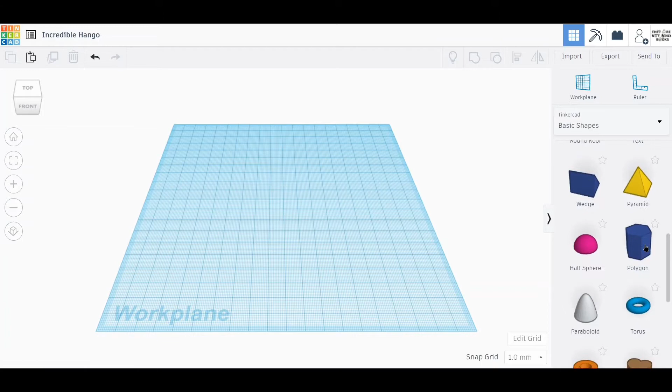Let's drag it over to the middle of the workspace. Since we're making a triangle, let's open this menu and set the sides to 3. Let's adjust the view to get a good angle, and use this top white dot to make the triangle a little flatter. If we hold Shift while dragging this corner white dot, we can keep the shape the same while making our triangle bigger.

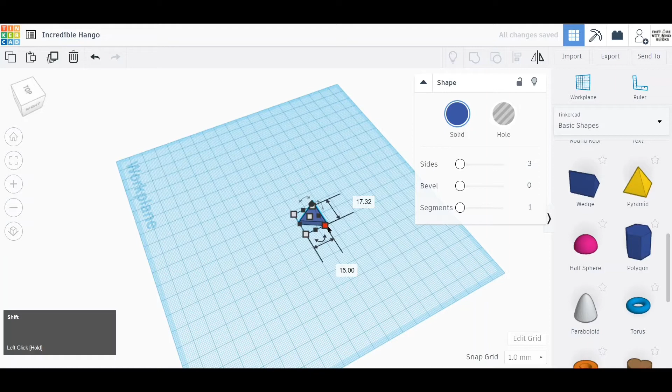Let's learn about holes now. Up until now, all we've been doing is adding shapes. There's also a way in Tinkercad to remove material. The basic idea is to create a shape and turn it into a hole that will carve away from anything solid it's touching.

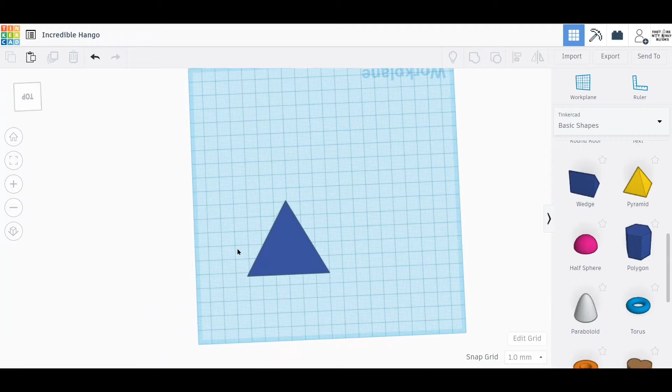Let's use this triangle as an example. We'll copy using Ctrl-C and paste using Ctrl-V our triangle to create another one the exact same size, then shrink it a little using the corner white dot and holding Shift. Let's switch views to make sure our new smaller triangle is taller than the original one.

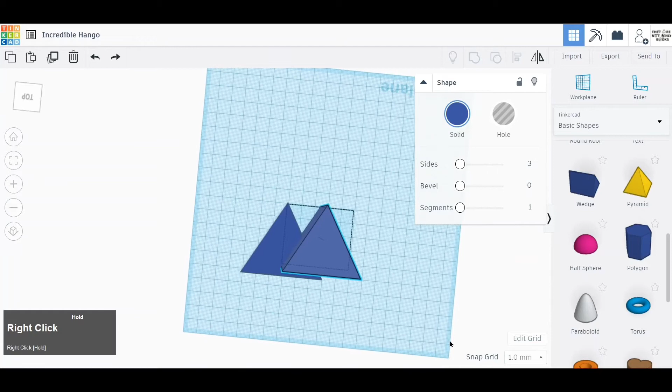Alright, let's return to the top view now and drag the smaller triangle over so it looks centered with the larger one. Over here, let's click this button - it turns the selected shape into a hole.

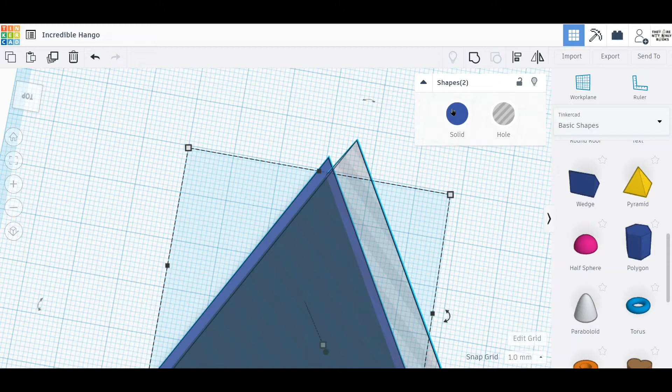Now, to actually carve out of the original triangle, we have to do what's called grouping. This means Tinkercad will treat the grouped objects like a single one, which is also good for making holes. We'll click on one triangle, hold Shift, and click the other to select both. Now we'll click this button, which will group them. Great, now we have our triangle.

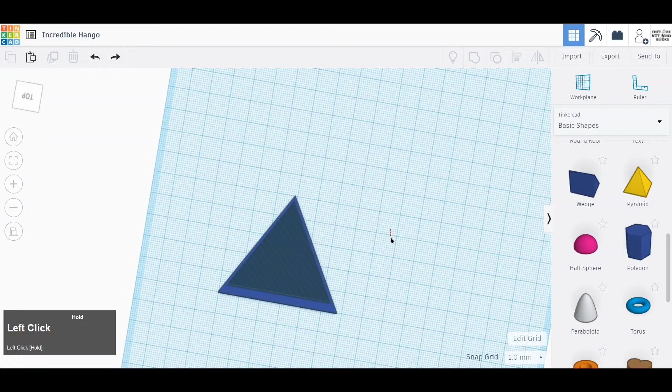Quick note: if you're having trouble centering your triangles, or it's difficult to make out how large they are, click this button over here. This new view is called orthographic, and it shows everything on a 2D plane. If you change the view to the top, it's way easier to see how the shapes look.

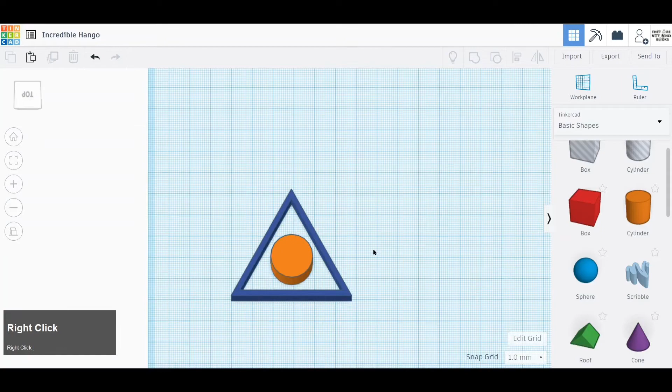Anyway, let's get back to this. Next, we're going to add our circle. Let's start by dragging over a cylinder and centering it inside the triangle. Before anything else, we need to make sure our cylinder is touching all the sides of the triangle. Let's check this by orbiting around. If it's not touching on all sides, make the cylinder a little bit bigger.

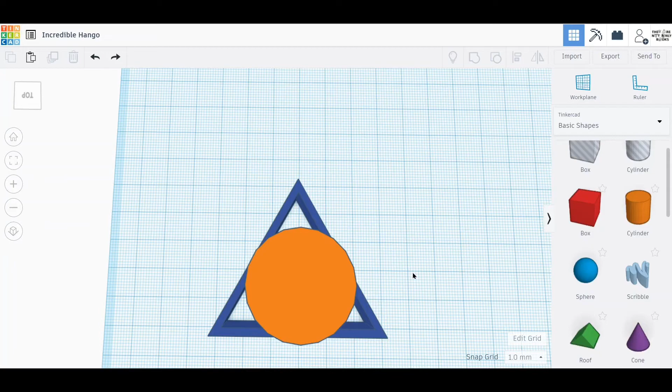Now, just like before, to make this shape a circle outline, we're going to add another smaller cylinder and make it a hole. So let's drag over the cylinder, resize it to be a little smaller than the original, make it taller, and drag it to center over the other cylinder.

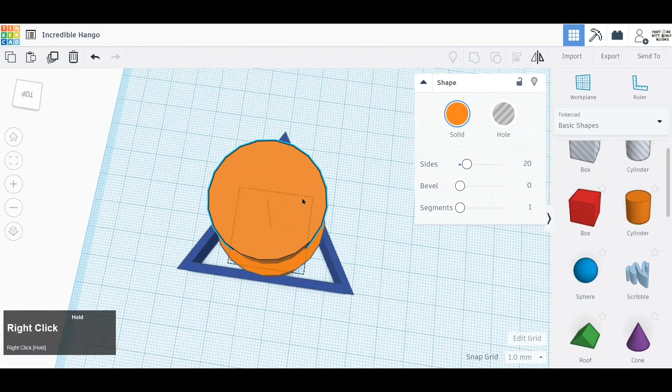This is where the benefits of orthographic view come in. From this view, it looks like our new cylinder is way bigger than the old one, but if we change our view, it clearly shows that it isn't. Using orthographic view gets rid of this illusion, making it easier to center it accurately using the arrow keys.

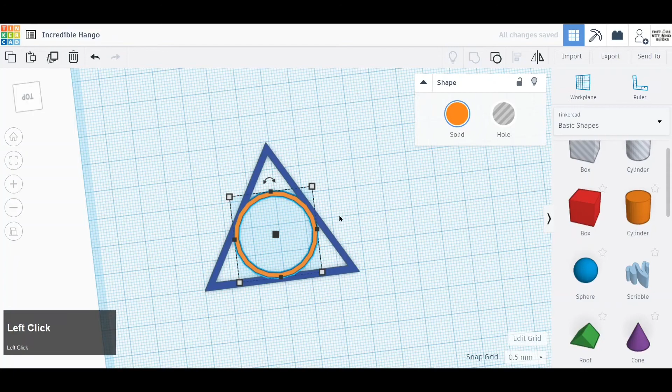Now, just like before, let's make it a hole and group it with the other cylinder. Now let's do the last part of the Deathly Hallows and add the line. This step is much simpler - let's drag in a cube and change the size to make it look more like a line.

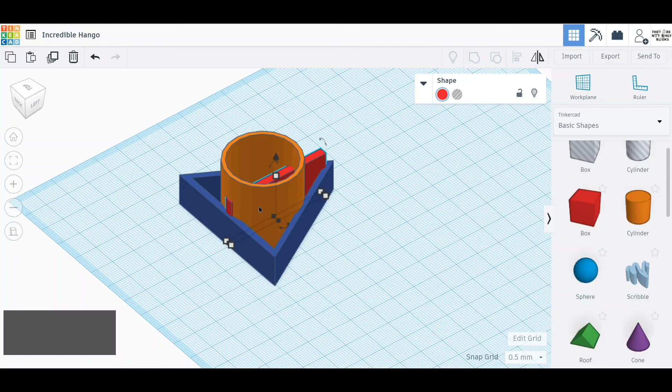Now let's drag it over to finish our symbol. Looks great. If we change our view, we can see that it is way too tall for a bookmark. Let's click on each object and change the height.

Now the last part for a bookmark is the part that'll mark the book. Let's drag over another cube, stretch it out to make it the right size, and flatten it out to make it level with the rest of the bookmark.

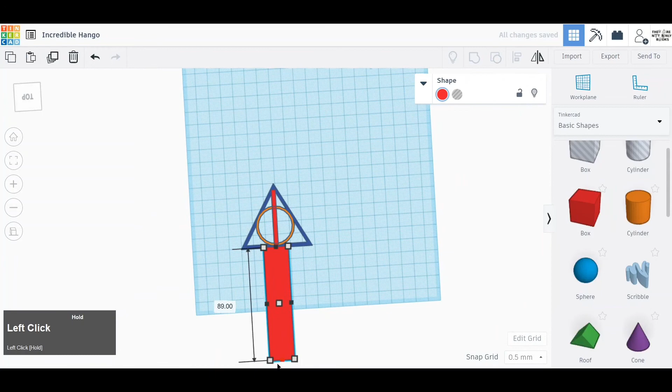I think it's important to note that Tinkercad shows us all these different colors so it's easier to look at the different shapes. If we did print this, it would be all in one color.